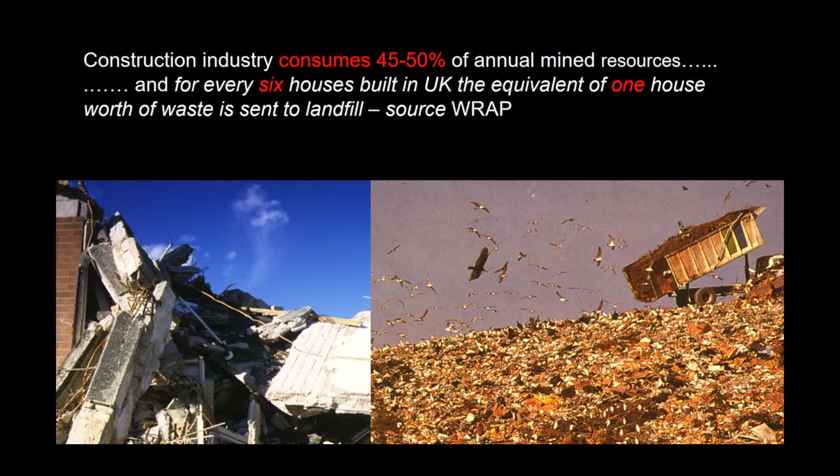5 or 10 years ago, for every 5 houses built, 1 house worth of material went to landfill or incineration. Now it's for every 6, maybe 7 houses built. But it's 1 house worth of stuff going to incineration. And we've only got 1 planet. And we're being encouraged still to frack our way out of recession. So what do we do? Well, it's not all bad.

The world's number 5 economy, California, and New York State, the day after this guy decided to pull out of the climate change protocol, got together and decided to ignore him. And a lot of people are ignoring him. And by the way, the US isn't out of the climate change agreement yet and can't be until the year after next. But maybe we should do that. And that's basically what most of humankind are doing at the moment.

But there is hope, and that's the currency we're dealing with here today at Green Architecture Day. We hope we can take a breath and pause to remind ourselves, to paraphrase Professor Michael Braungart, who wrote Cradle to Cradle, that humankind is part of planet Earth's natural ecosystem. We are not alien to it. We have a hugely disproportionate negative impact on our planet, but we have the collective knowledge and know-how to make the decision to work in harmony with our host planet.

And some people are doing really good work. I actually was going to not talk and just play her TEDx talk, which just cuts to the chase, but I thought a lot of people have either seen it or could see it. So go and see Greta's presentation. You can go across the courtyard and see this building.

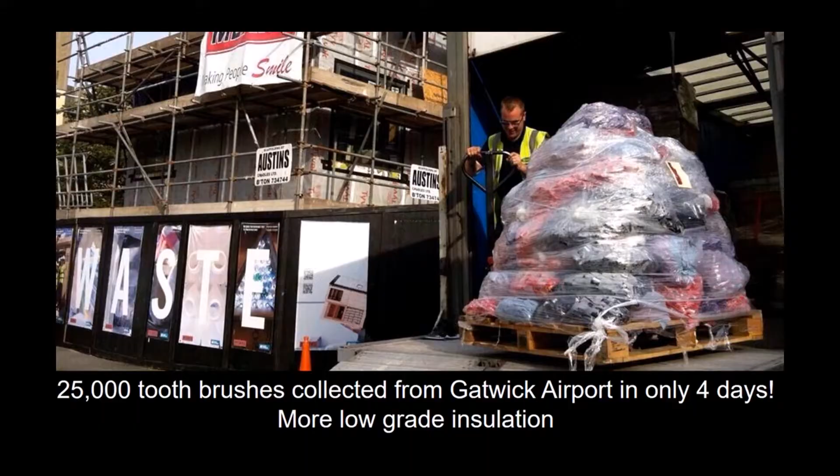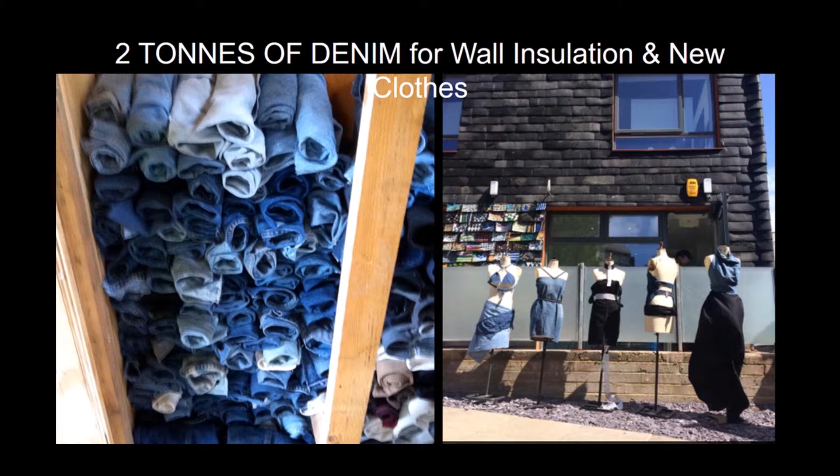4,000 VHS videos. Denim, this is interesting. This is denim, which is part of a 21st century successful business plan. Import ready-made jeans from China, cut the legs off and sell shorts at festivals. So we've got 2 tons of denim legs. They're actually a very good insulator. Vinyl banners, my own bag is made out of these vinyl banners. We use them as a vapor control layer in the construction of the Waste House.

So what would happen is that Cat Fletcher would find stuff and I'd take either a minute a day or a month to work out what we could actually do with it. So this is one of the reasons I think designers can sort of unpack the problems, because we know how things are put together. So we can unpack the problem. We can design out waste. We can decide to select a certain material over another to create a thing, an artifact.

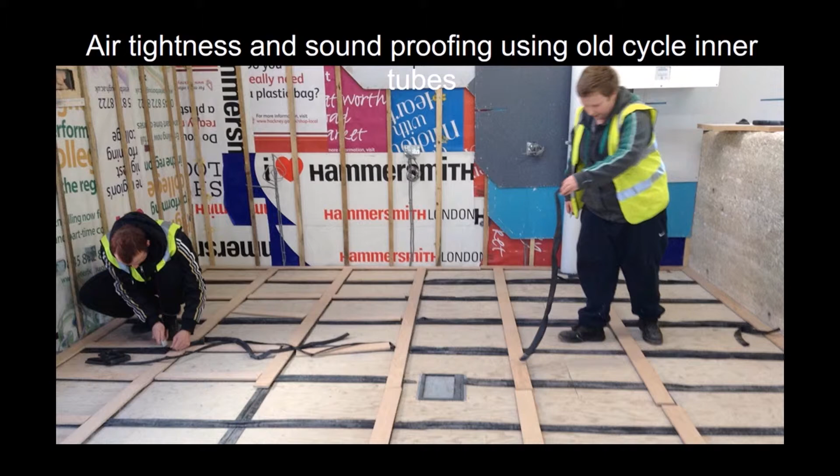We've got bicycle inner tubes for soundproofing, carpet tiles to clad the outside of the building with a fire rating. These are second-hand carpet tiles. And you get this other sort of thing that happens. We're using unusual material sources, and you get a different sensibility, a different feeling to the architecture. It's got stories. This is upstairs. This is my colleague that teaches with me. He's a product designer. And it's also had some sort of impact.

So I wrote for the Government Office for Science a paper on the potentials of the circular economy in the construction industry. And that's the idea that buildings are constructed to be material stores for the future. So you don't stick them together, you don't make them as monoliths, you make them like Meccano, so they can be unbolted and reused again and again.

So there's been quite a few different books that the Waste House has been in, and I wrote my own one. And the idea here was, I mentioned Professor Michael Braungart earlier, he wrote Cradle to Cradle with the subtitle, Remaking the Way We Make Things. And he would stand up and say, recycling and reuse is a waste of time, it will all end up in our oceans one day. You're only delaying the inevitable.

But I actually thought there was some merit in recycling, even though it's rather basic. But I think if it's married and partnered with cleaning up the environment, it's useful. Reuse, I think, is important. Reduce is where you turn up as a designer at a situation and you may not use any material, where normally you'd be compelled to use stuff just to get a fee. And obviously, step 4 is the holy grail of closed-loop systems, where there's no such thing as waste.

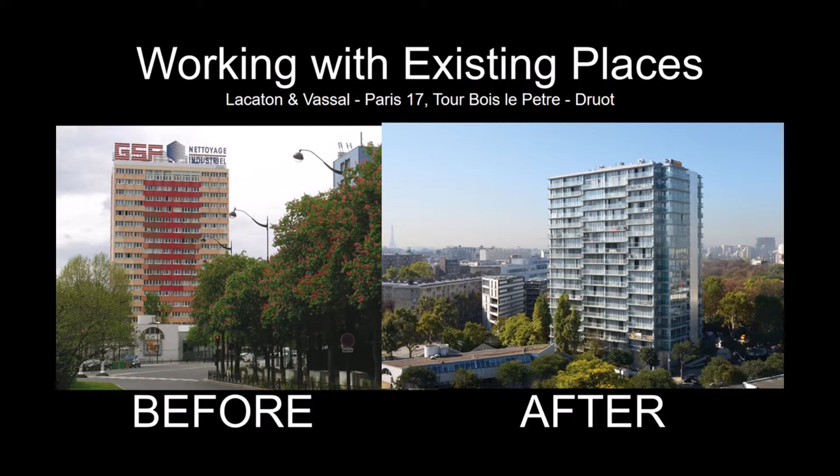Reduce is even cleverer, in my opinion. It's turning up at a situation and deciding that perhaps you don't need to use a lot of new material to get what you need. And this is Lacaton and Vassal in Paris, who famously went to the mayor of Paris and said that tower block there on the left, we know you're going to demolish it. We know you've put aside 38 million euros to do that. We'll give you a new tower block for 2/3 the price.

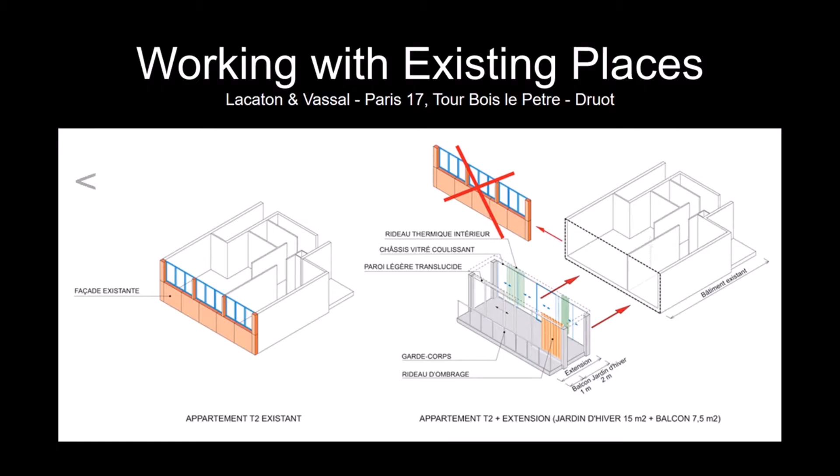And they did that by removing the concrete facade, one panel at a time, off the existing flats, and then bolting on this new winter garden. So the occupants of the flats stayed in the flats while this was happening, which is a big deal. The front gets taken off, this gets bolted on. And the significance of that was profound. So there the winter gardens are going up, and that's before and after. It's the same apartment, but before and after.

Before, you've got small windows, lack of ventilation, lack of light, so you have to have lights on all day. You've got no insulation, you're overheating, or you're cold. It's grim. Take the wall away. You've got extended floor area. You've wrapped the building in an unheated but thermally sound insulating jacket. You've got loads of opportunity for ventilation, human controlled, loads of extra light, 40% saving in energy bills. This is sheltered housing for older people, and the benefit to their quality of life is huge. And the local authority, Paris in this case, save money.

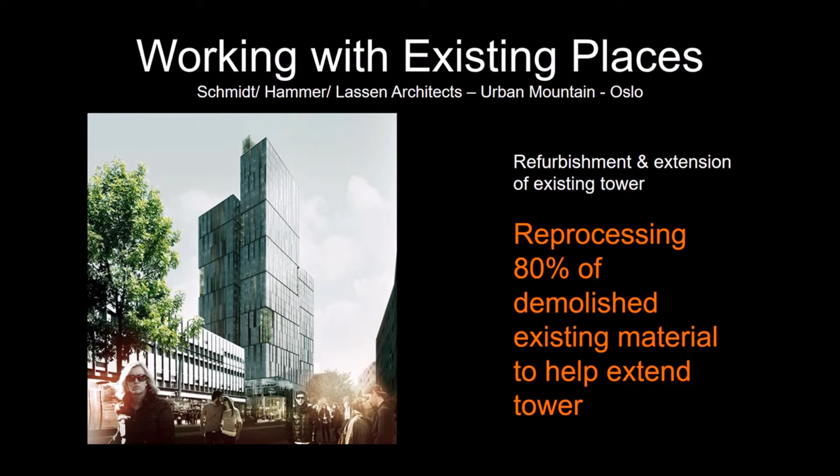In this case, this is about to go on site. This is by Oslo railway station. And what's interesting about this is an existing tower block from the 1970s that's being extended and refurbished. The thing that's most interesting is this statement. So that's about understanding your supply chain, and I could talk for another half hour about that project. It is all about designers understanding and knowing the people that supply the stuff for them.

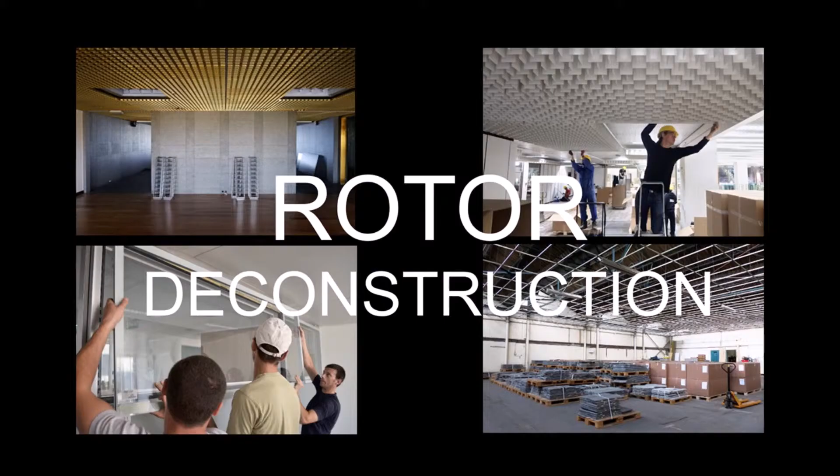These people are really clever. They're called Rotor. They're based in Brussels. And I knew them because they curated interesting exhibitions. But they now deconstruct buildings that other people would demolish. So you read that top left to bottom right.

And some of that work is difficult. But they have the sensibility of designers and artists and academics, and they get down on their knees and get dirty, as it were. This is part of the World Trade Center in Brussels. It's being demolished. Oh, no, it's not. It's being deconstructed by Rotor.

So even these are the sorts of buildings that are creating a huge carbon footprint at the moment, that are consuming a lot of resources. Financial districts in cities around the world are throwing up buildings that no one really likes. They're statements, and they only last for 20 years because the people behind them, or the companies, have got money, and that thing on the right, for example, might have been all right in 1992, but it's not a good public image now, so it's going to come down.

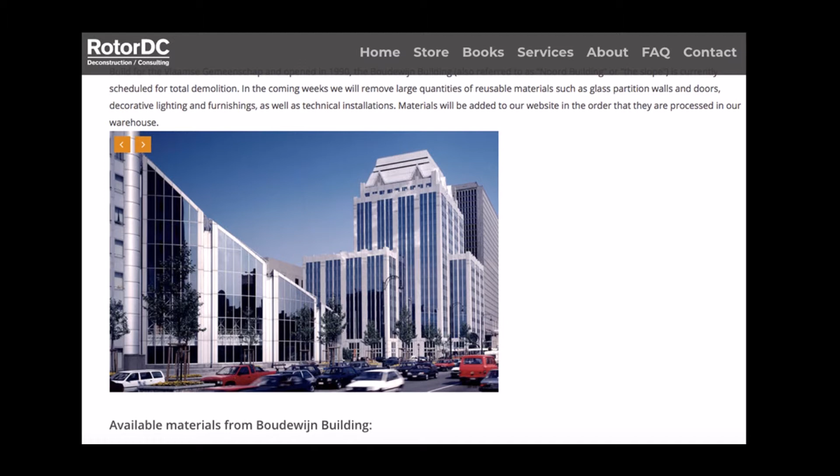These buildings would have got refurbished internally every 3 to 5 years. So what Rotor are proving is that this stuff does not have to be thrown away. And they have a website where you can buy stuff.

Other people are finding other techniques. This is SuperUse who invented this harvest map idea. So you locate where your site is, where your building is, whatever your project is, and then you look nearby for materials. This might be, as I did for years, locally sourced organic, natural materials, or it could just be stuff lying around. I did an event called the Waste Zone a couple of weeks ago, and we had a consultancy there that had mapped the resource potential of the greater Amsterdam metropolitan district in terms of its ability to supply construction sites with materials.

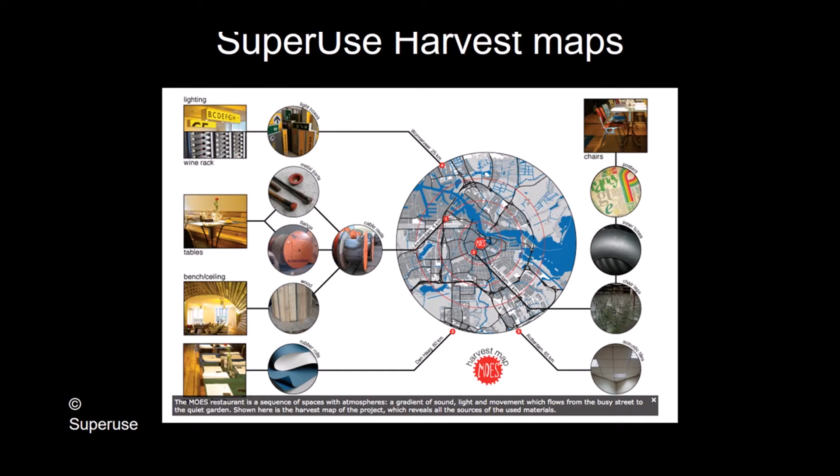So Dr. Zoe Laughlin last year on BBC4 dug up a landfill site that was 40 years old. Even the newspapers were in good health. Nothing had decomposed. So what we need to be doing is mining the Anthropocene. The Anthropocene being the human-made layer of stuff that wraps planet Earth at the moment, plastic in our oceans, pollution in the atmosphere, cities, whatever, the stuff you're sitting on at the moment. We need to rework what's already been produced. We do not need to mine anything else.

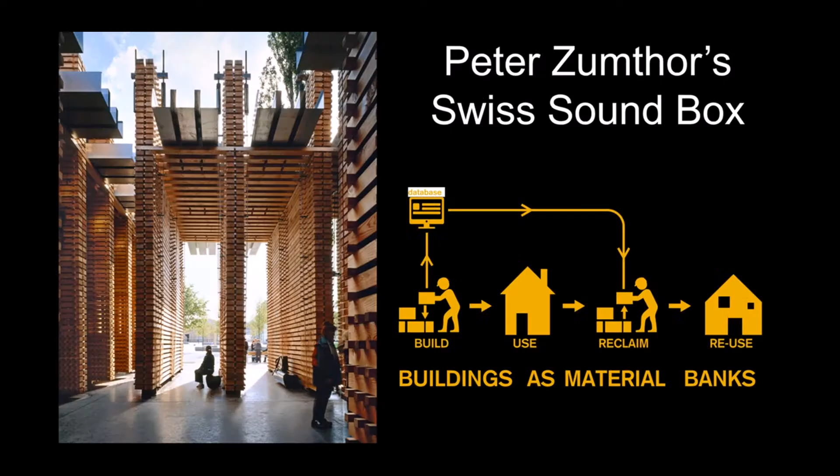So, step 4 is the circular economy, the Holy Grail. This is a building from the year 2000, which is all about a building as a material bank or material store. Peter Zumthor's Swiss soundbox. It was a huge building, actually, a huge pavilion. Pavilions, at the end of an expo, either get bought up and put in a park somewhere, or they're put in storage, or they're thrown away.

This one, if you can have a really good look at the image on the left, you've got steel springs there, and at the end of its life, or its first life, the springs were disconnected, and there you've just got a pile of timber. And that was given away to projects across Hannover.

So in the circular economy, you've got 2 spheres. You've got the biosphere, which is where stuff is organic and compostable and can be designed to be reused again and again, but ultimately compost and food, organic food for the natural environment. The tech sphere is where everything else goes. And it's a lot of stuff that we use in our day-to-day lives. So it's that stuff where designers have really got to step up.

So it's the designers of the products, the systems, and the materials to ensure that we can design things for reuse. And in the case of a mobile phone at the moment, 95% of it can either be recycled or reused. We just choose not to. So you need to design for disassembly, and you think of these technical things as nutrients.

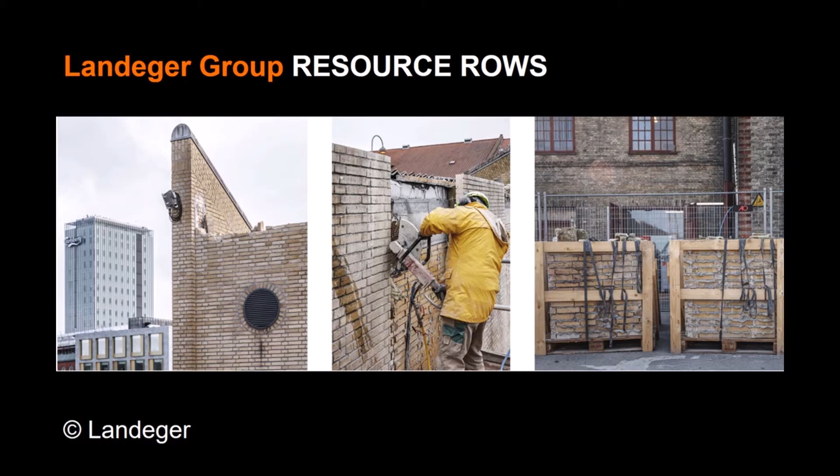This is just one interesting project in Denmark. Traditionally, 20th century brick buildings were difficult to deconstruct. You can't really deconstruct them because the mortar's stronger than brickwork, so you just end up with rubble. But these guys, the Lendager Group, got to a 1960s brick building with an angle grinder, and this is on site at the moment. So that's a situation that would have normally been recycling, but is actually a reuse project. Actually, I haven't been there, so I don't know if it's that colour or that colour. I prefer that colour.

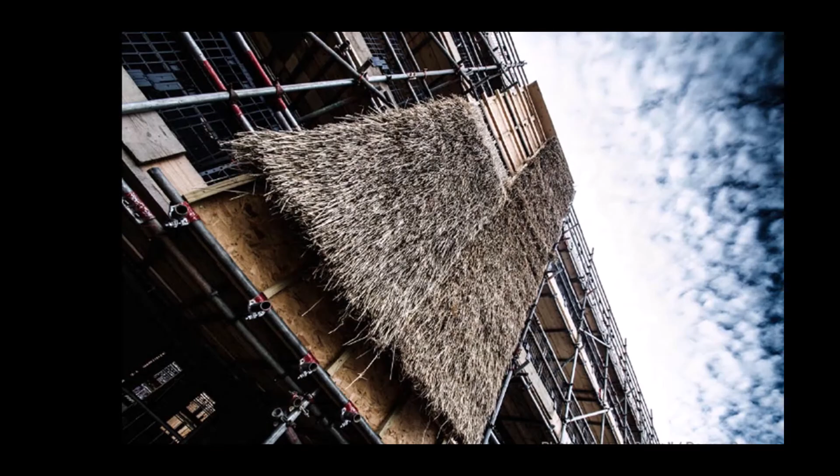So this is the really interesting stuff, growing buildings. And a lot of you may know this building, but it is still amazing, by Architype. It's a new university building at UEA. And the first thing that Architype did when they got the gig was to speak to local farmers and order acreage of crops. So this is just proving that the straw stuff doesn't have to be little one-off buildings. This is a proper university building. And what I like about this shot is that most of what you're looking at, apart from the glass, the electrical fittings and the hidden wiring and plumbing, services in other words, is compostable.

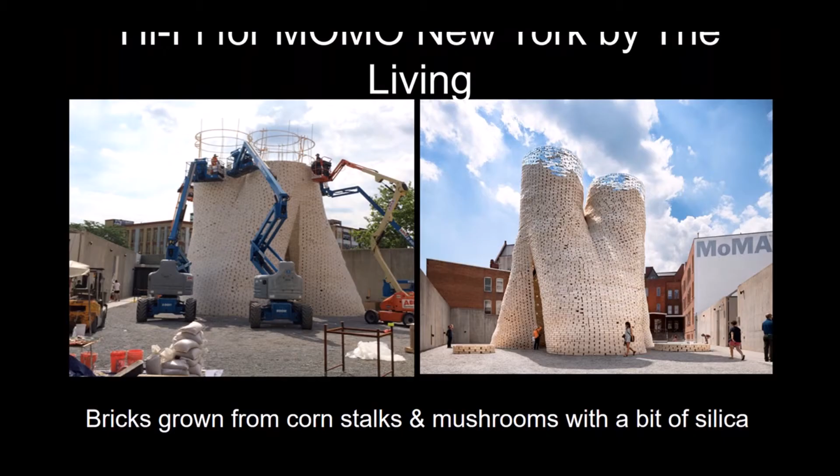The floor finish, the balustrade, the walls is compostable. This is compostable. So this was built by a practice called The Living. And it was a temporary building, but it was up for 6 months in New York.

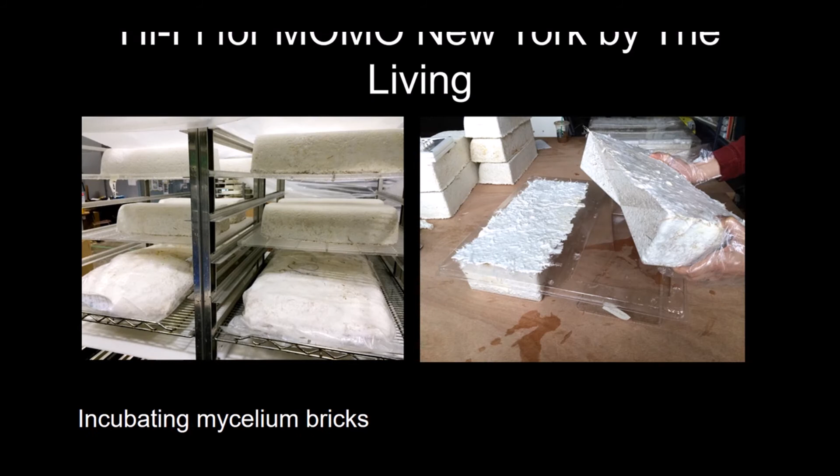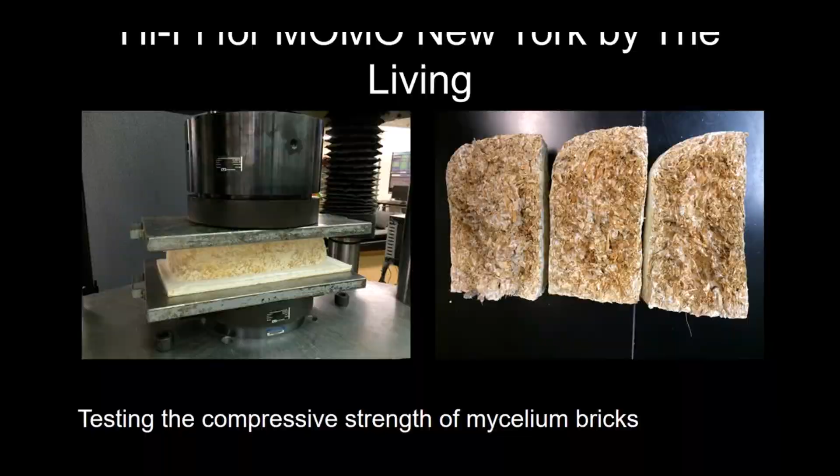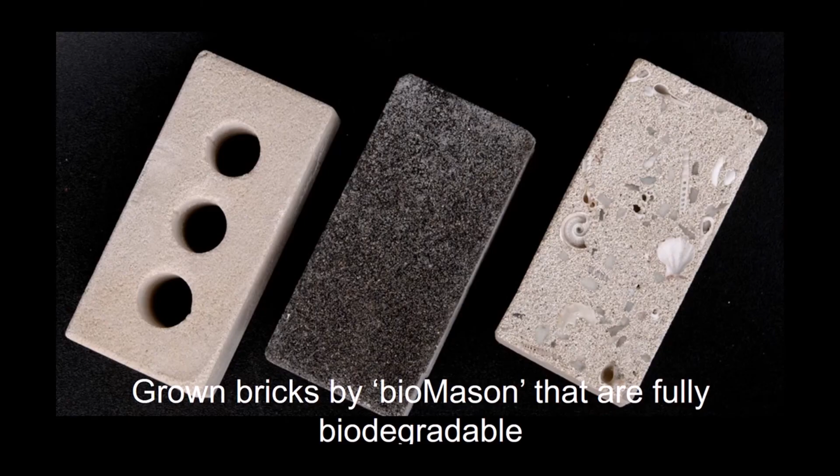And those bricks are made of mycelium. So this is bricks that are grown, mushrooms. This is them being compressed. You've seen the compressive strength here. This is something called Hack the Root, and it was up in the Liverpool Biennial last September. So that is mushrooms at the end of the day. This is a bit more robust. This is silica, sand, and mushrooms.

This is a slightly different concept. It's not a pretty building, but it's really interesting from my point of view because this is the ABN-AMRO Bank in Amsterdam, and this is their CIRCL Pavilion. This is their 18 million euro CIRCL Pavilion. And it's completely influenced by a development up the road on a former shipbuilding site. The development's called De Ceuvel.

And it's a collection of about 45 old houseboats that have been hauled up onto the land and turned into studios and cafes and stuff. And everything's a circular system. They deal with their own water, create food, power, the whole permaculture thing. And what was interesting is the ABN-AMRO Bank looked at that and they applied it to this building. So this building is a material store for the future. The insulation's made from denim from the employees of the bank, etc.

But the most interesting thing is that Petron van Heel, who was the banker client for this group, said the sort of thing you'd expect a banker to say at first. We have a portfolio of 600 billion euros of property around the world that we're invested in. So we're a financial bank, but now we're also a materials bank.

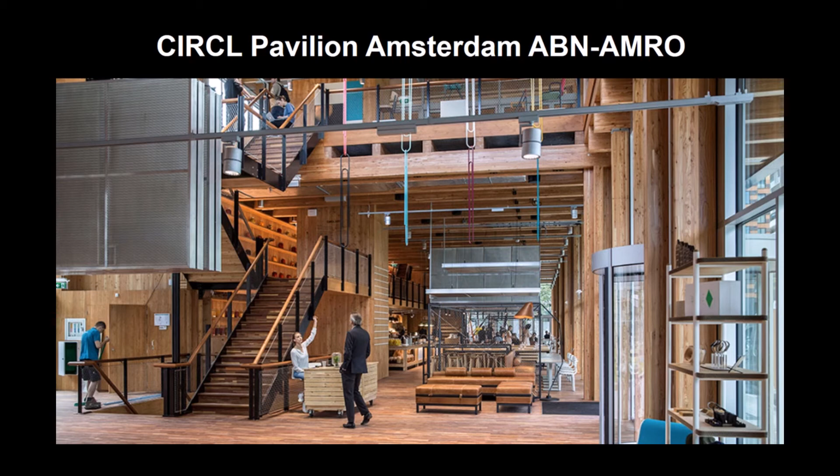If you're designing a building and it's a financial plan for 20 years, because at the end of 20 years the building's probably going to be demolished, you're throwing away all that material, and the building is a financial deficit at the end of its life. That's the current model. If your building is a material store for the future, you've got a financial asset. So even for the banks, this makes complete sense, as well as saving the environment.

You hang around there because I've got to stop.

2 minutes. Right, we're doing research projects across the road. You'll see the waste house. We're working on all sorts of material flows and turning them into construction materials. So we've been working with duvets because everyone throws away a duvet, nobody reuses it. And we've been looking at how to turn duvets, which the ones we collected with Veolia, 3/4 were polyester and 1/4 feathers. So we've got experiments with making feather boards and other waste materials from the Preston Barracks site.

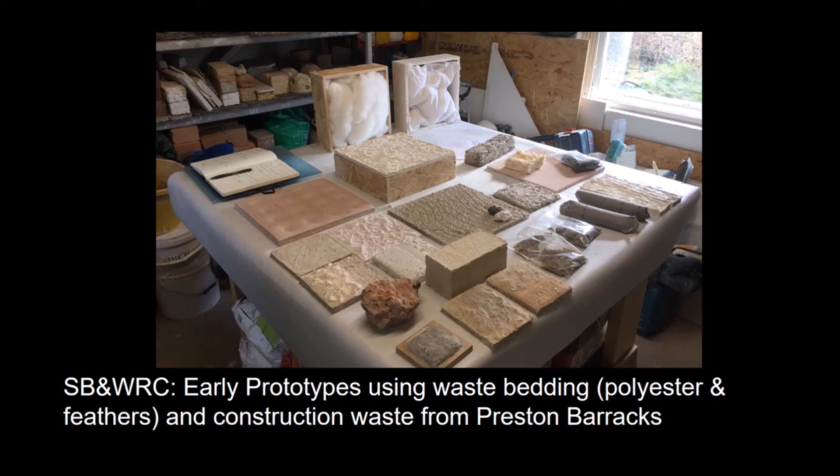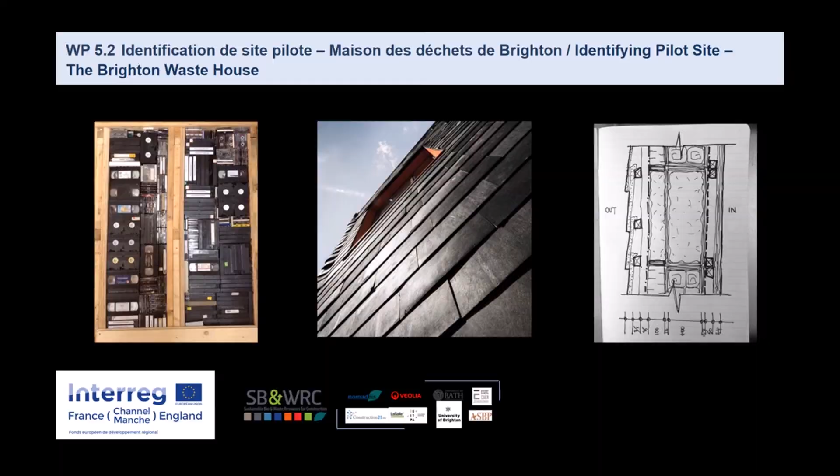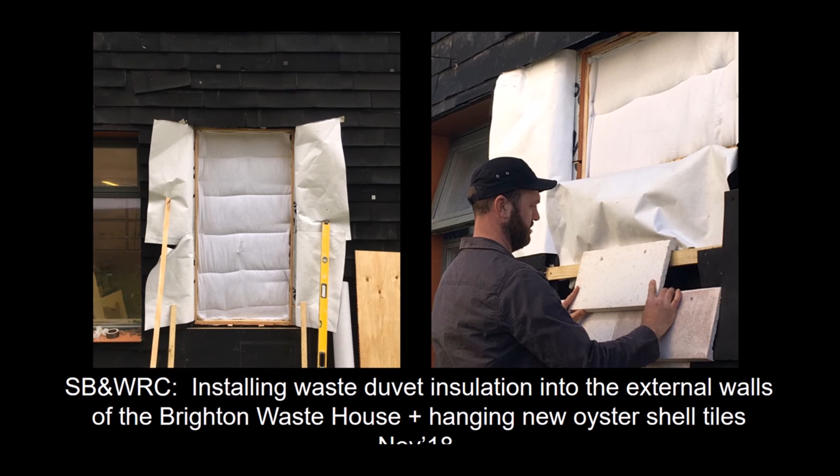So we've used the waste house as the pilot scheme, the test bed, and we've removed some of the DVDs and video cassettes and replaced them with duvets that we're measuring at the moment in terms of their thermal performance. We were asked to find a difficult textile material and recycle it and turn it into insulation. What we did is find a textile material that already had a TOG value, which gives you its insulation value, and then just shove it in the cavity in the waste house. So that was reuse. We're monitoring the performance of it. The BBC picked up on it just before Christmas. That was nice on radio and TV.

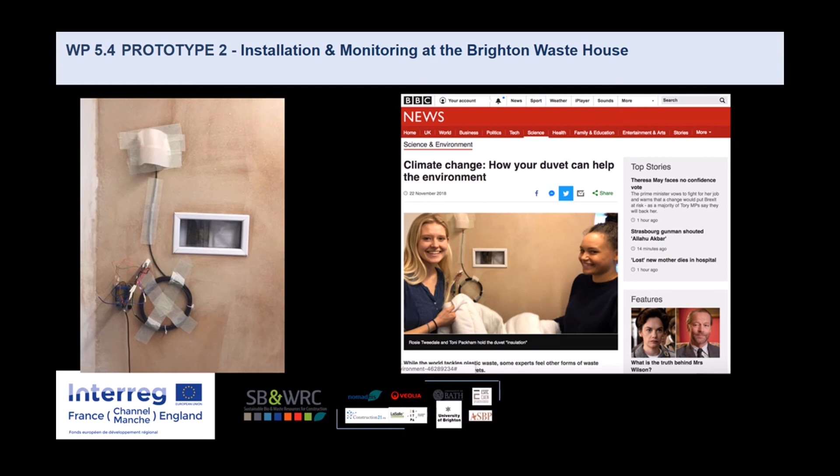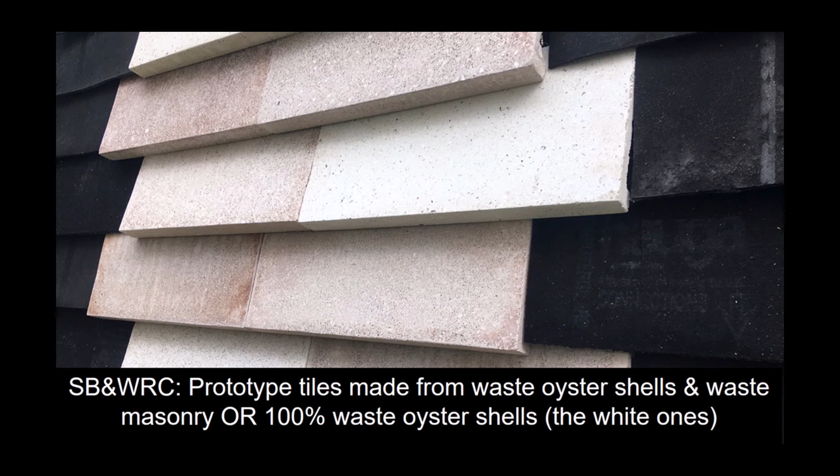But then we found English's throwing away 50,000 oyster shells a year. So another local waste stream, and we turn them into tiles. So the waste house has currently got these tiles on the outside. The white ones are 100% waste oyster shells. The ones that have got a bit of pink in them have got masonry waste from Preston Barracks. And a lot of people are talking about it and getting interested.